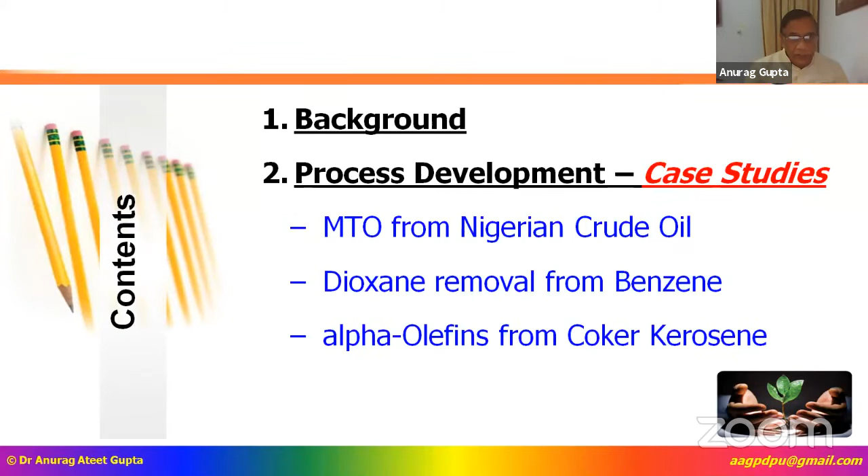So the topic of my presentation is innovation-based case studies on industrial process development. The total presentation is divided into two parts. I'll give a small background, and then I'll discuss with all of you three very important case studies.

Why these case studies, and what for these case studies? They are basically based on innovation, and these case studies created IPR, that is patents, and they are related to oil refineries. So in the background, I'll be discussing very briefly about innovation, creativity, what exactly is IPR, how this IPR is relevant, and how this is related to the refineries and what are the refineries - and I'll do that in a brief manner.

Now, what exactly is the difference between innovation and invention? The invention basically has two very important key features, that is creation and the first time. So invention can be defined as the creation of a product or introduction of a process for the first time. Then when we talk about innovation, of course there are so many definitions for innovation. The one which I like most is that it is basically the process of translating that invention or idea into a good or service that primarily creates value. So that is the difference between invention and innovation.

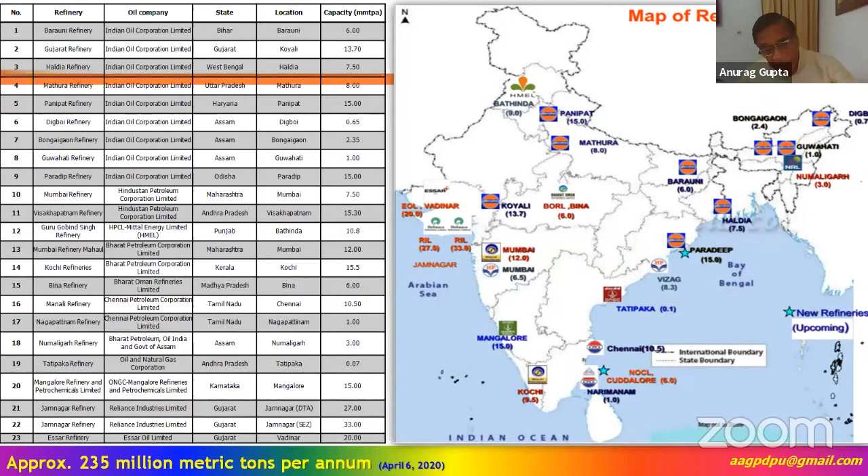In India, we have got 23 public as well as private sector refineries, and they are processing to the tune of about 235 million metric tons of crude per annum. This is as per the data published on 6th of April 2020.

Now, there are basically two types of refineries - I would say broadly two types, otherwise it could be three or four types. One of them is a refinery which is making only fuels, starting from gases, LPG, to gasoline, jet fuel, diesel, kerosene, and fuel oil. This is the simplistic configuration of a fuel-based refinery.

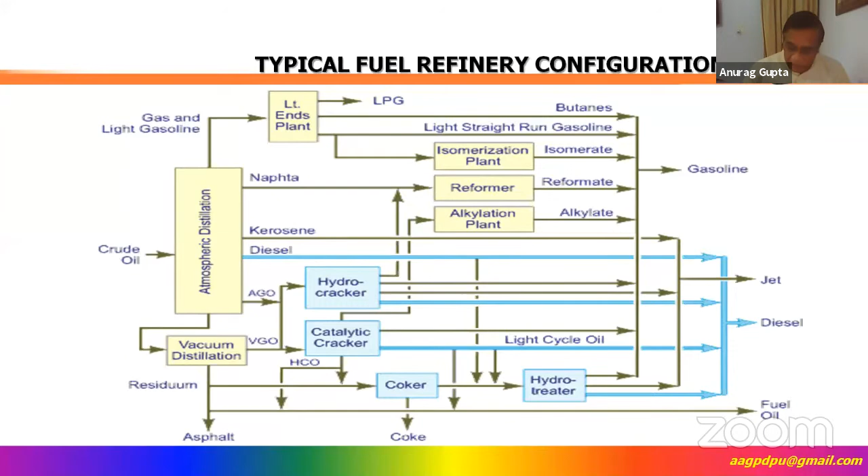There is another type of refinery which basically makes and processes lubricant oils. So you take the residue from the atmospheric distillation bottom and process it using different types of refining processes, and you end up with lubricants. These lubricants, along with additives, would produce lube oils, which are being used in so many applications.

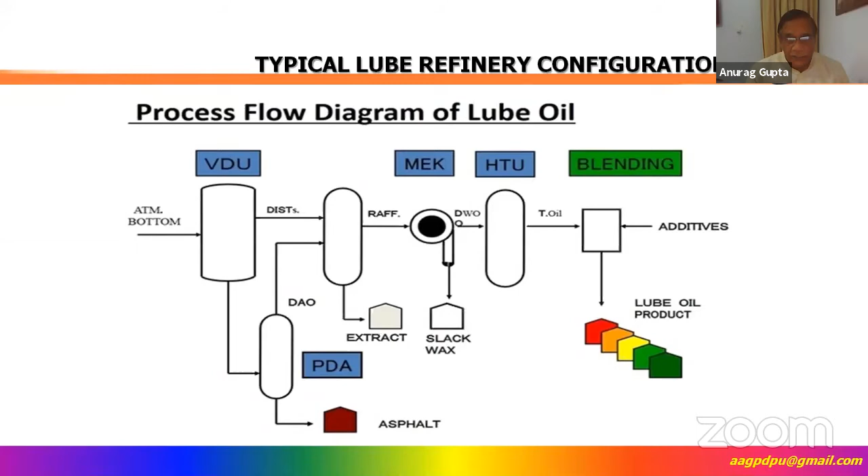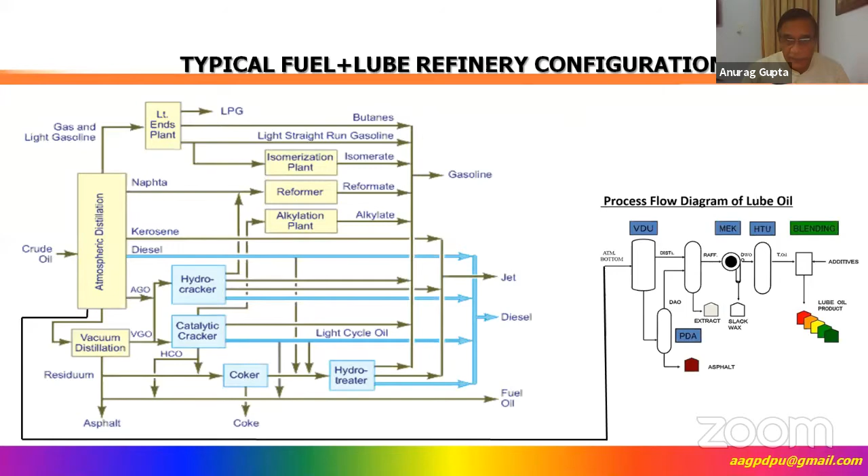But there is another type of refinery, which is a combination of these two - a single refinery making and processing fuels as well as lubricant oil. The classical refinery in our country is Chennai Petroleum Corporation Limited, CPCL. It's the only refinery in our country which is making both fuels as well as lubricants.

There are other types of refineries also which are integrated with petrochemicals. Of course, it has got no direct relevance with this particular presentation, so I am not going to discuss about those types of refineries.

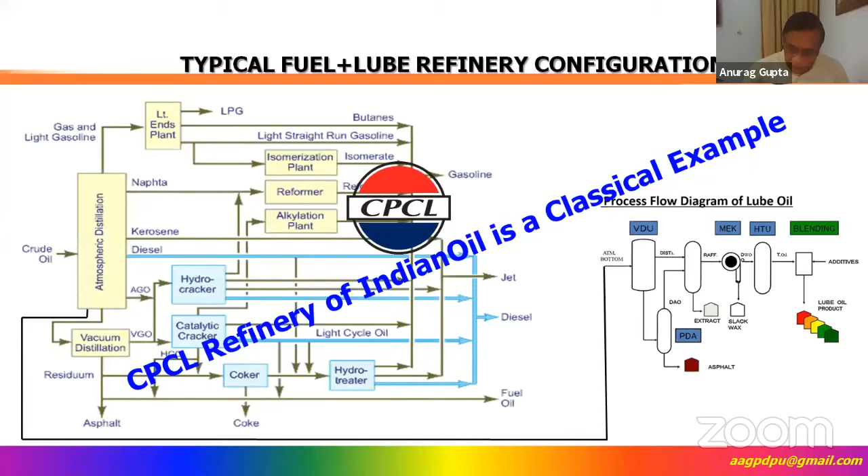Now, up till now, I have discussed with you three aspects: innovation, invention, IPR, and what exactly is the refinery. These particular three case studies are basically related to all these three aspects which I have just discussed with all of you.

In all three case studies, the strategy my team adopted was basically providing simple solutions to complex problems. But a simple solution is the toughest challenge. Simple solution doesn't mean you just go and do it and everything falls in order. All three case studies I've taken are basically about providing simple solutions to very complex problems.

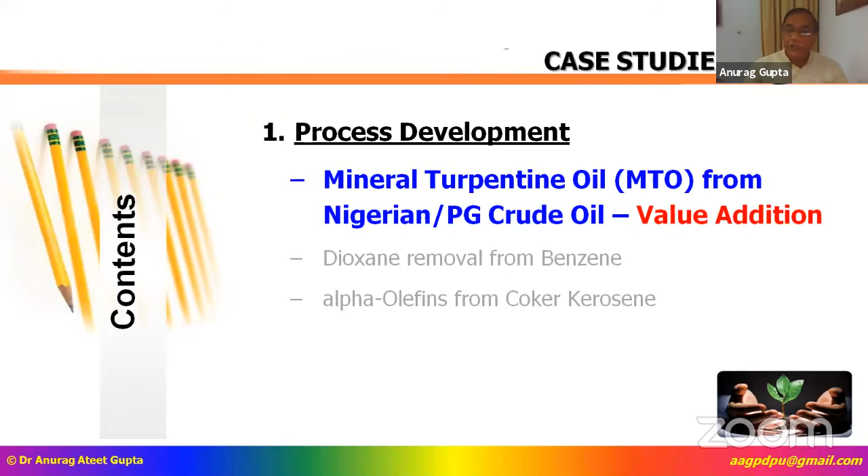So I'll start with the first case study. This is basically for producing mineral turpentine oil from Nigerian and Persian Gulf crude oil, which is value addition to the refineries. This is a very complex refinery process, but I'm not going to discuss the details because it's very complex.

Most important thing is that along with fuels and lubricants, refineries are also making solvents. And this MTO, or mineral turpentine oil, is one of the very important solvents being used industrially in so many applications.

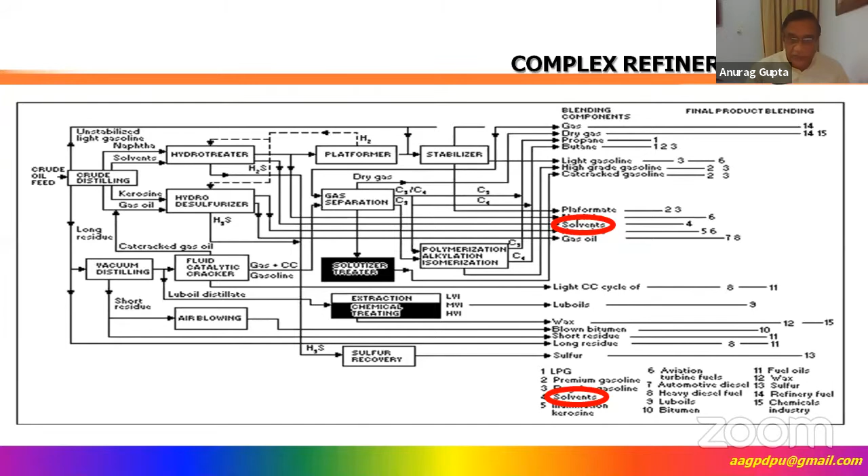Indian Oil, for example, is a bulk producer of mineral turpentine oil. This MTO has a narrow boiling range of 145 to 205 degrees centigrade, and most importantly it should be colorless - the Saybolt color rating should be better than +20. MTO is manufactured by some Indian oil refineries meeting the Bureau of Indian Standards specification, IS 1745 1978.

Now, the most important thing for making MTO is that high sulfur and nitrogen containing crude oils are not suitable for its production. But high nitrogen and sulfur crudes are the cheaper crudes. So if you look at the Indian scenario, all our refineries are basically tuned to take worst quality crude to produce best quality fuel - meaning we process and procure very high sulfur and nitrogen containing crude oils because they're cheaper. Since we import more than 85% of our crude oil, this becomes very important for the economics.

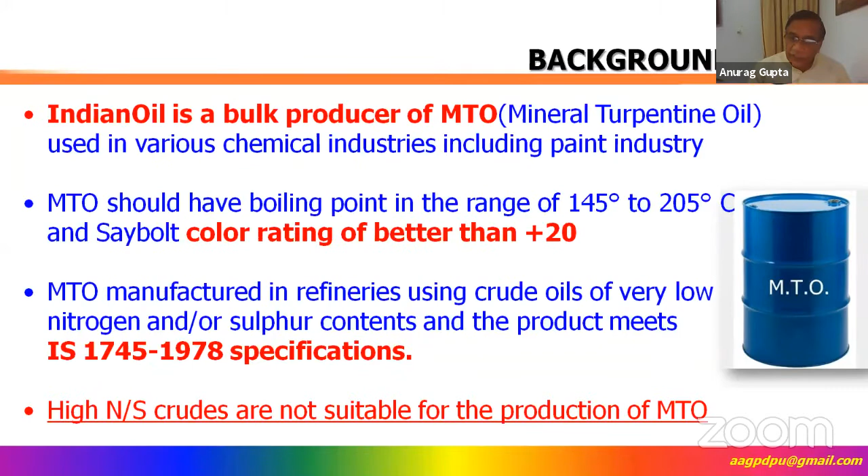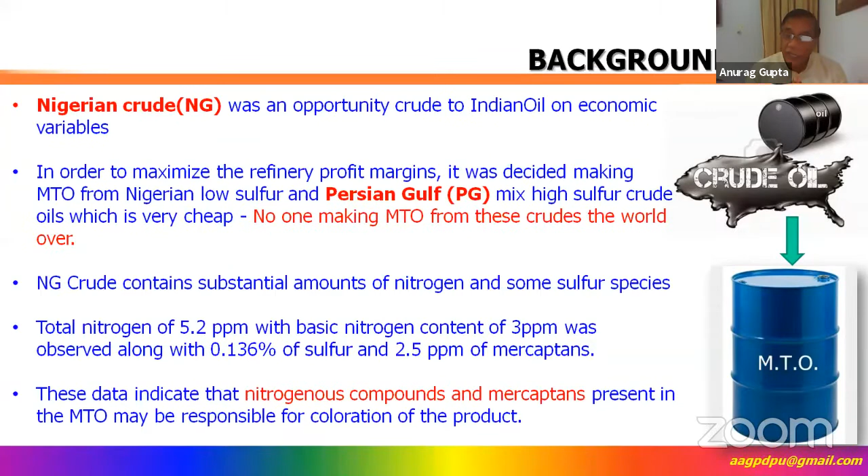So Nigerian crude and Persian Gulf crude oil contain huge amounts of sulfur and nitrogen. These types of crude oils are not suitable for making MTO, which should be water white and free from sulfur and nitrogen species.

There is a big challenge because one of Indian Oil's biggest refineries, Panipat refinery, processes Nigerian and Persian Gulf crude. They also wanted to make mineral turpentine oil because in the northern part of the country, the requirement of MTO is enormous. So they posed this challenge to Indian Oil R&D Center to devise a process by which high sulfur and nitrogen containing crude oils can be used for making mineral turpentine oil.

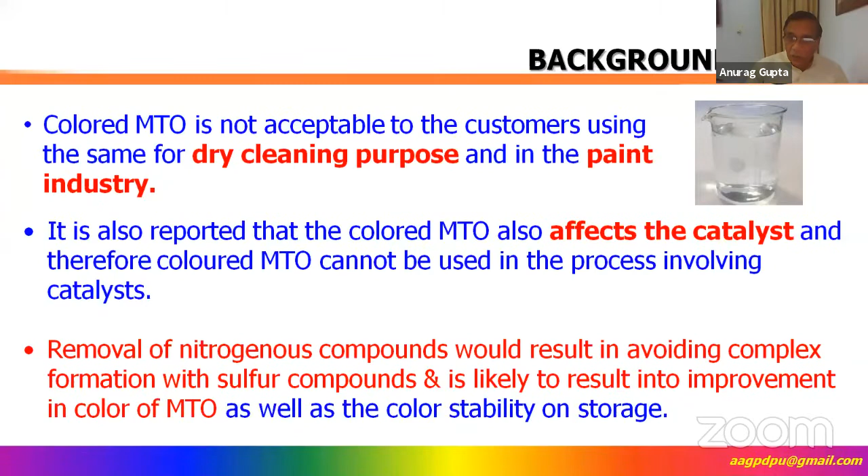Why is color very important? Because MTO is often used for dry cleaning purposes, so if you have color it will basically make your clothes colored. It's also used in the paint industry and as a solvent in different processes. If you have high amounts of nitrogen and sulfur, it affects the catalyst. So removal of nitrogenous compounds and sulfur becomes very important to make a good quality mineral turpentine oil.

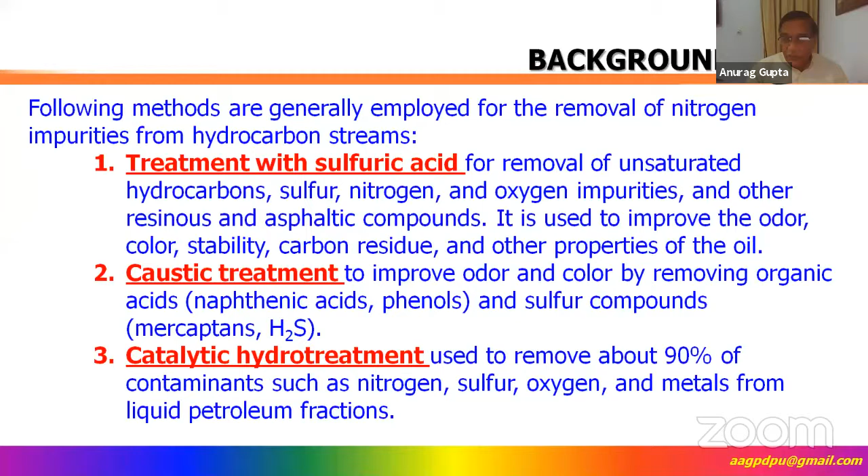What are the processes for making these types of MTO? Treatment with sulfuric acid, treatment with caustic soda, and catalytic hydrotreatment. But there are issues - refineries process everything in million metric tons, not kilograms or tons. So handling voluminous amounts of corrosive mineral acids and alkali at the refinery is not advisable. Also, with catalytic hydrotreatment, hydrogen being very costly makes the process uneconomical, and the cost of MTO would go very high and not be affordable for customers.

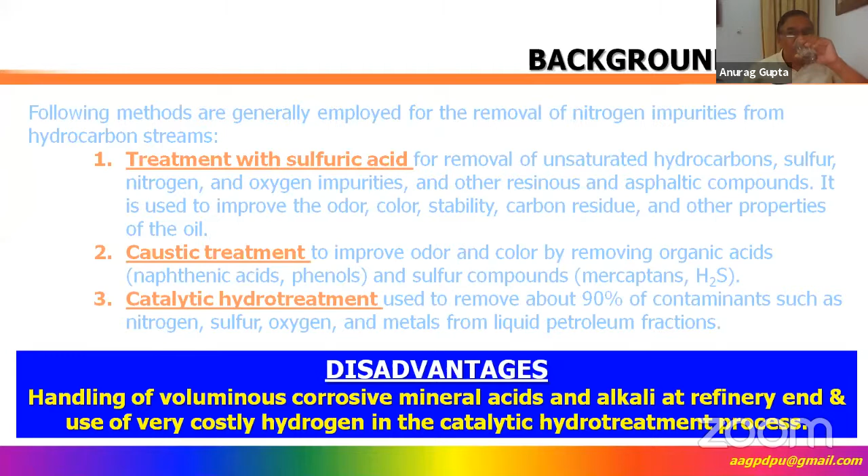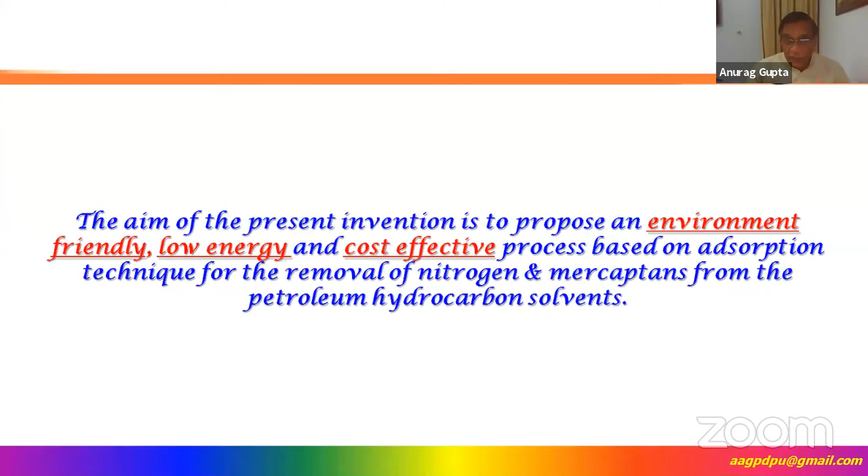So the aim for the present invention is to propose an environment-friendly process avoiding acid and alkali, a very low energy process - because increasing the energy of the process raises the cost - and of course a cost-effective process, preferably based on adsorption technique, because that can be put up at the refinery at very low cost and with low processing time. So this was the aim for this case study.

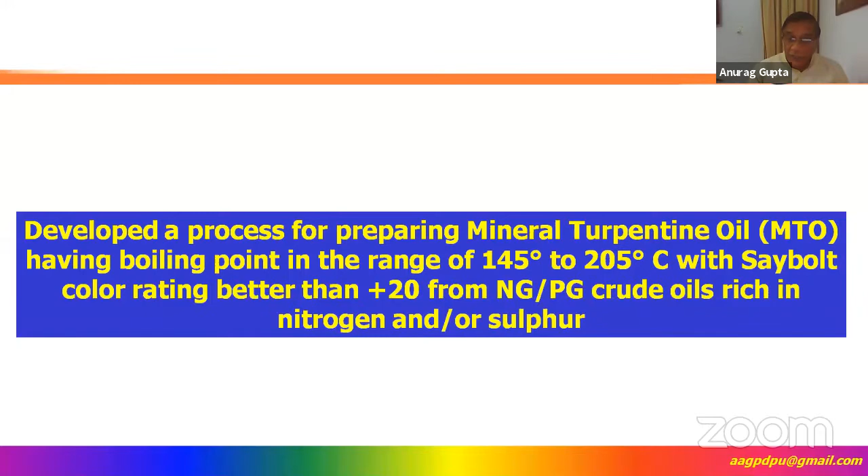So at Indian Oil R&D Center, we developed a process for making MTO having a boiling point in the range of 145 to 205 degrees centigrade from the worst type of crude oil - Nigerian crude oil and Persian Gulf crude, which were rich in nitrogen and sulfur, as I discussed just now.

Now look at the regular process at the refinery. There is a distillation section wherein crude oil comes and it is being distilled into different fractions. A particular fraction boiling in the range of about 130 to 250 is separated and treated in the Merox process, wherein sulfur is deactivated. And from there, you do a distillation in order to get a product boiling in the range of mineral turpentine oil, that is 145 to 205 degrees centigrade. Up to these three sections, everything is possible and in position in the refineries.

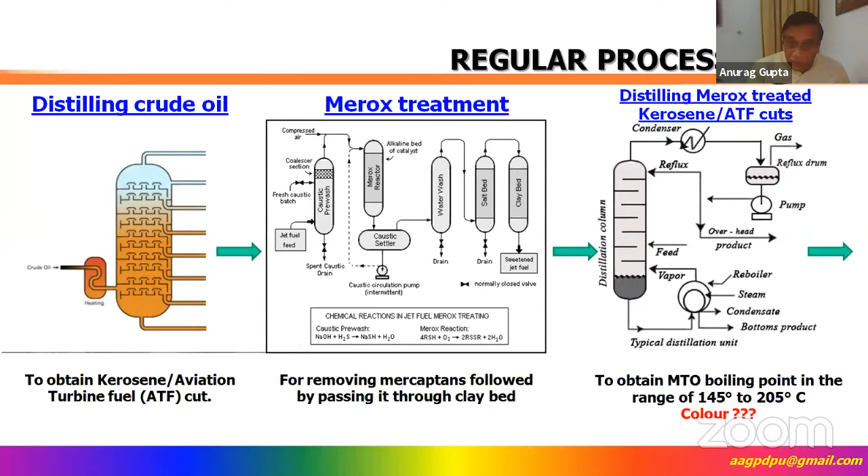But the problem is of color. So what we did was, this is the innovative step. The rundown MTO from the previous section was subjected to liquid phase adsorption using molecular sieves, modified clays, and mixture thereof. And the most important thing was the temperatures were ambient, so we can save on energy, and the pressures were also ambient, so you need not have higher pressure applied onto the process.

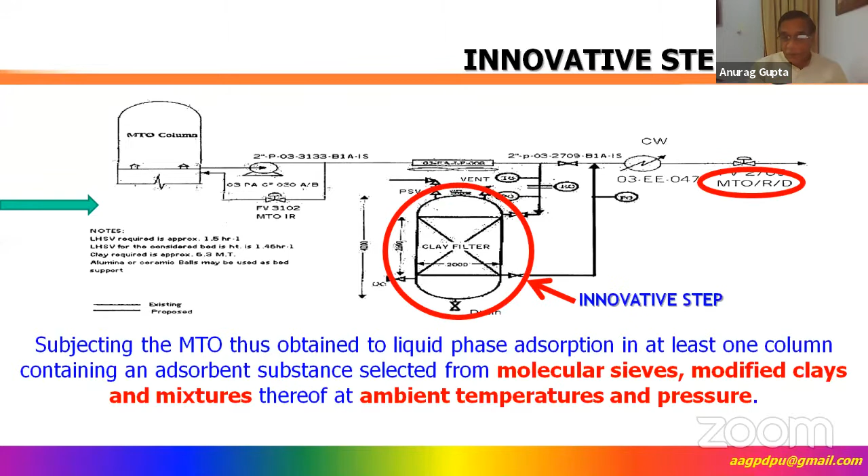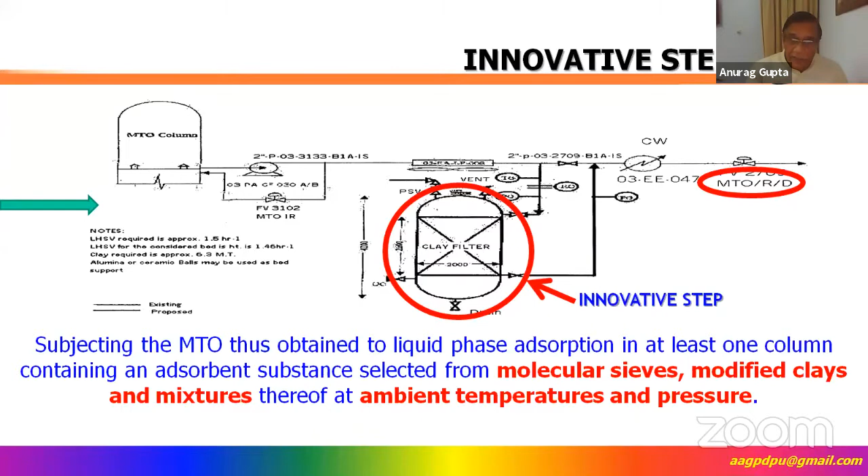So what we did, it's a very simple sort of thing. We put up a column, which we call a clay filter, filled either with molecular sieves, modified clay, or mixture thereof. And we get MTO, which meets the requirement of Bureau of Indian Standard specification in the same boiling range, and water white. So look at this particular thing, a very, very simple solution to a very complex problem. Because none of the refineries in any part of the world is making MTO from crude like Persian Gulf or Nigerian crude. So this is a very simple solution to a complex problem.

So what we did was we used molecular sieves of different types. We used a modified clay known as Filtrol 24, very readily available in the refineries, basically for production of aviation turbine fuel. So nothing we imported, nothing we bought from outside, everything was available, even the column was available in the refinery. So the total cost of this particular project was to the tune of only 5 lakhs, which is nothing.

Another important thing was that these clays and molecular sieves, which are used for making this water white MTO, can be regenerated also. It can be regenerated by passing a high nitrogen stream at a temperature of about 200 to 300 degrees centigrade to regenerate that particular clay or molecular sieve, so that you can keep recycling the same molecular sieves and clay in the process for at least 200 to 300 runs at a time.

So this process was upscaled at the Panipat refinery, and commercial production started from 2001 onwards. A very, very interesting story, which I'll discuss with you at the end of this presentation. We filed Indian and US patents, and you'll be surprised to know that we got this particular patent within 2 years. That US patent, we got it within 2 years. So this is one case study.

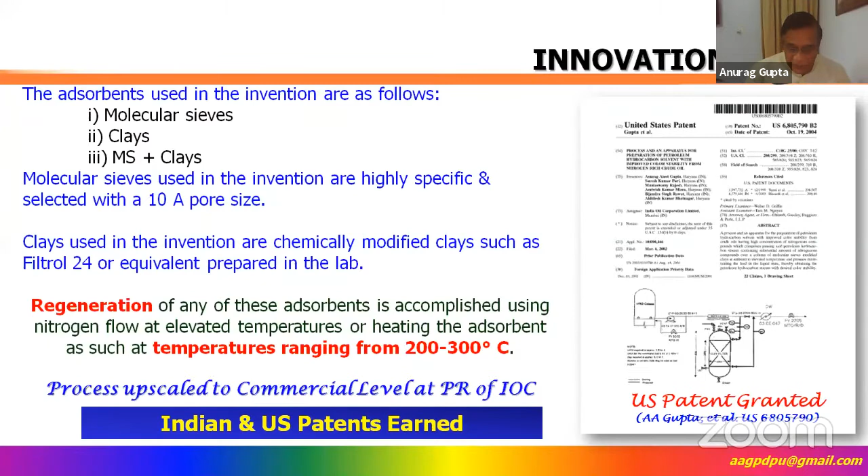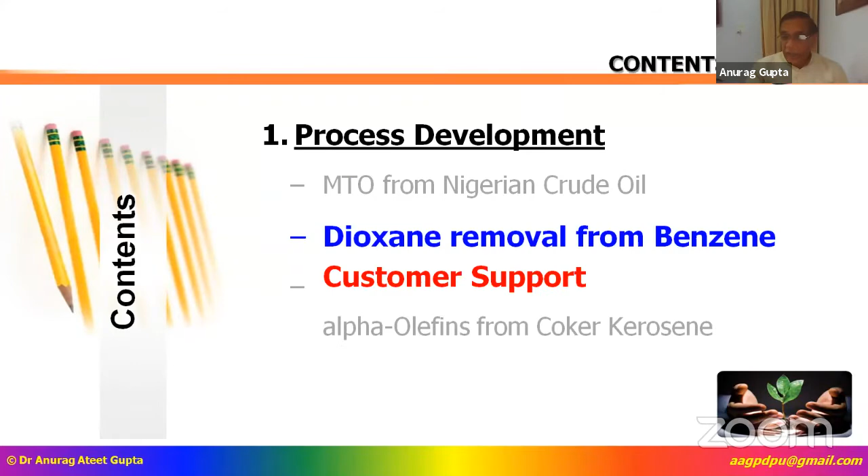Second case study, which I want to discuss, is another very important aspect: dioxane removal from benzene, basically for customer support. You must all be knowing Nirma. In mid 90s, around 1998-99, they set up a linear alkyl benzene manufacturing plant based on solid catalyst. That was the first such plant in our country, also known as the Detal process, from a process licensor called UOP, that is Universal Oil Products. So it's based on the UOP technology. And they positioned this particular plant very close to the Indian Oil Refinery of Baroda.

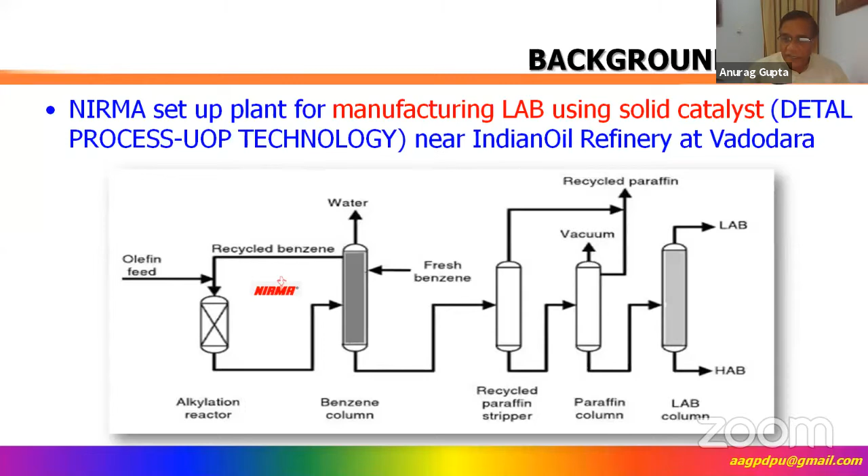So this is basically the schematics, I'm not going to discuss. It basically takes olefinic feed and produces linear alkyl benzene and heavy alkyl benzene. So they require a very specific type of benzene. It should not have dioxane content more than 1 ppm. Dioxane is a chemical I'll discuss with you a little later. The concentration of dioxane, because dioxane is the poison of the particular process, should not be more than 1 part per million.

And at the Gujarat refinery, the same UOP has provided a technology known as UDEX that was operational, wherein the refinery was using a chemical called TTEG.

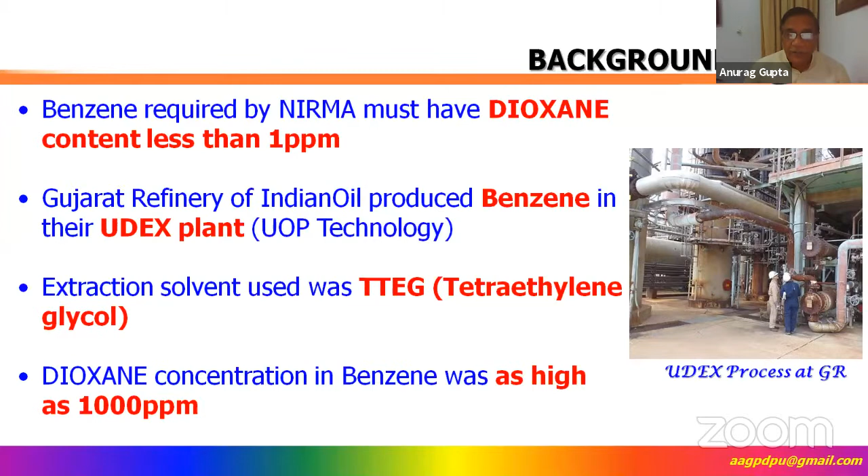So the UDEX plant is basically using TTEG, that is tetraethylene glycol, for extracting and making benzene. But when we tested this particular sample of ours at the Gujarat refinery, we found that the dioxane concentration was to the tune of about 1000 parts per million. So there was a big challenge to cut down 1000 parts per million to just 1 part per million. This is basically the schematic of the UDEX process. It takes naphtha, going through various processes, including the extraction.

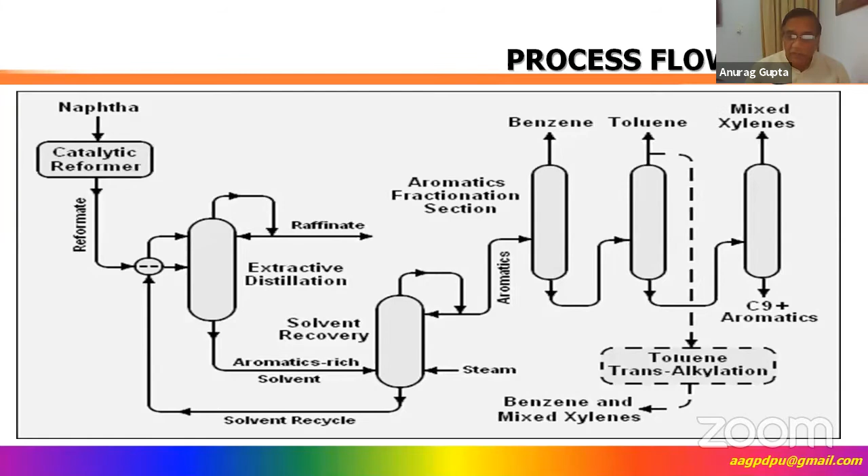It basically gives benzene, but of course, having a large amount of dioxane content. So Indian Oil then approached UOP, because the process license with Nirma was also from UOP, and our process was also based on UOP technology.

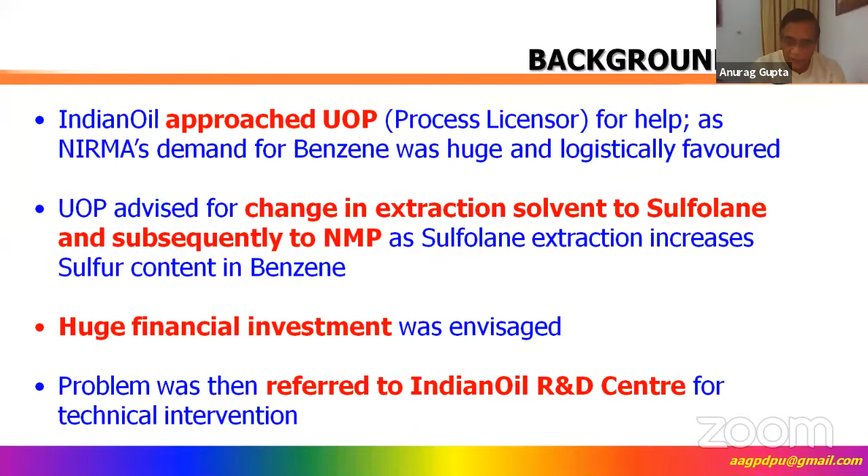UOP in turn advised that with this particular TTEG, it is next to impossible, it cannot be done. So therefore, you'll have to convert the entire process either to sulfolane extraction or to NMP extraction, which was costed at that point in time at about 600 crores of Indian rupees. So of course, it was a big amount of money. Therefore, this particular problem was referred to Indian Oil R&D Center for technical intervention.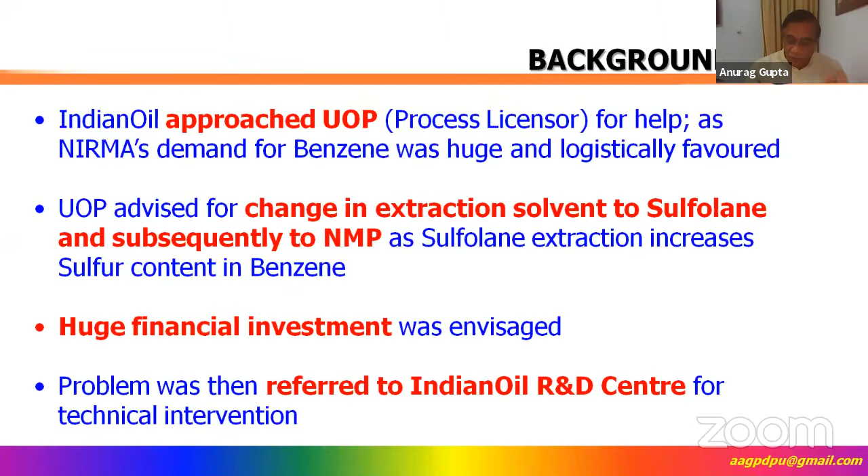So how did we approach this, and what innovation did we do?

First and foremost, my team basically tried to understand how this dioxane is being formed in the benzene. Since TTEG is being used, ethylene glycol and diethylene glycol are basically the impurities. So 2 moles of ethylene glycol, in presence of sulfuric acid, forms dioxane, and this is basically the mechanism for that. And if you have diethylene glycol at elevated temperature in presence of acid, it also forms dioxane.

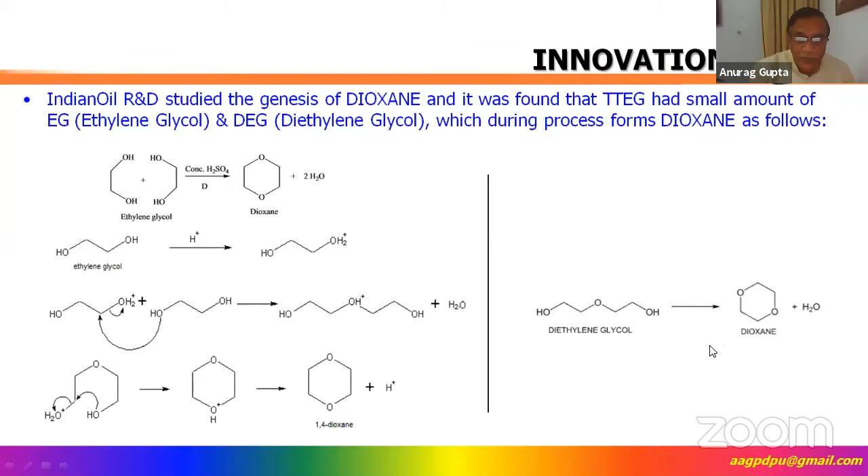So we came to know why dioxane is present in excess quantity in the TTEG. Our first strategy was, if you want to cut down the dioxane from the TTEG, the concentration of ethylene glycol and diethylene glycol should be substantially removed from the extractant tetraethylene glycol. So this is one strategy we adopted.

The second thing we found out was that dioxane forms an azeotrope with toluene, because toluene is one of the impurities or components of benzene, and a certain amount of toluene is allowed in the specification itself. So we found that if you cut down toluene concentration, eventually the dioxane would also come down in the downstream of benzene. This is the second innovation and strategy we adopted.

And then we finished the rundown benzene with liquid phase adsorption using molecular sieve and modified clay, which we had used earlier for the MTO process, so we had that sort of experience with us. Adopting these three strategies, we did trials in the laboratory, and we found that yes, we can achieve a benzene having less than 1 part per million of dioxane.

So we did plant trials at the then IPCL at Baroda. What we did was, we approached the TTEG supplier and said we want TTEG having less than 0.5% of ethylene glycol and diethylene glycol, which he gladly supplied to us. And at the pilot plant trial, we could generate benzene with less than 1 part per million of dioxane.

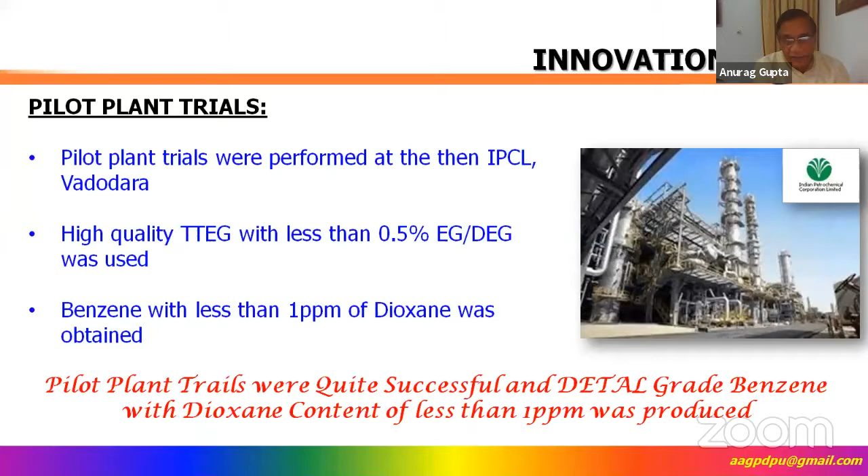So the pilot plant trials were really successful. We presented this to our management, and management in turn took it up with NIRMA, and we sent samples to NIRMA, and NIRMA approved those samples.

So look at this, this is a very simple solution to a very complex problem. The complex problem was that, as per UOP, we were supposed to revamp the entire process to produce benzene having less than 1 part per million of dioxane. But what we did was provide a very simple solution so as to make dioxane-free benzene in the existing system.

So we did a successful commercial trial in our Gujarat refinery. We produced a large amount of benzene. We had given samples to NIRMA, NIRMA approved those samples, and since then we started supplying detal grade benzene to NIRMA on a sustainable basis.

So in the process, we filed both Indian as well as US patents, and here also we got this particular patent in about 2 years' time. So this is another success story or a case study which I wanted to discuss with all of you.

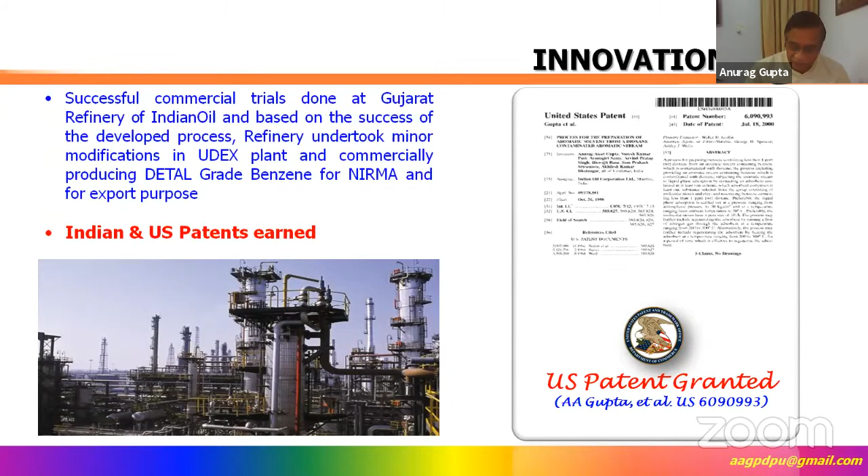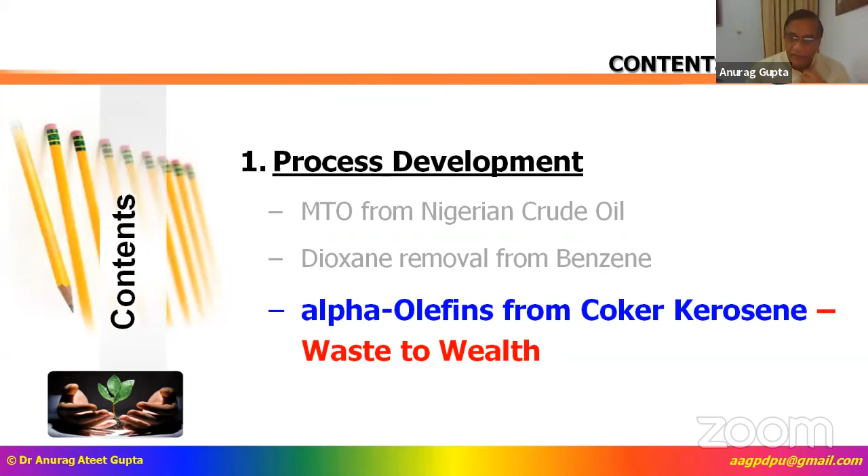Now, the third case study is also very important and very interesting, and that is making alpha olefins from coker kerosene. This is basically converting waste to wealth. How waste to wealth? That I'll be discussing in the ensuing slides.

See, this is a typical coker-based refinery. In Indian Oil, the Barauni refinery, which is in the northeastern part of our country, has got a big coker unit which basically produces, along with different types of products, industrial fuels.

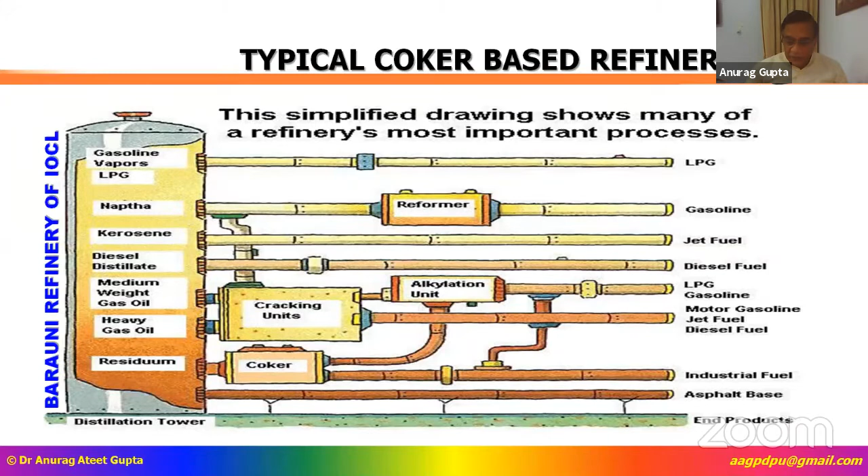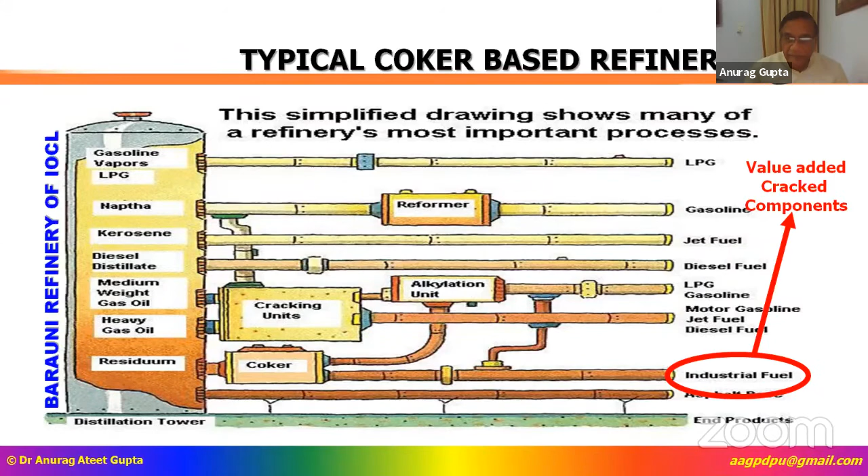Now these industrial fuels contain very valuable crack products. Crack product means olefinic products. They contain a lot of alpha olefins and normal paraffins, which are very valuable raw materials for making different types of value-added chemicals.

For example, you can do isomerization with the alpha olefins to get streams which can be used for high octane gasoline. You can do metathesis to get different types of linear internal olefins. You can do oligomerization to have medium molecular weight products. You can do dimerization, you can do isomerization - I mean, you name a chemical reaction, you can do it.

This particular stream from the coker-based refinery was basically a waste stream, but it contains a very valuable component, that is alpha olefins and normal paraffins. Now there is a small story behind why we have taken up this particular project.

Around the 90s, this particular refinery, Barauni refinery, was not getting substantial amounts of crude oil for processing. So the refinery was looking for some avenues, some projects, which could add value to make the refinery profitable. So when we presented this project to them, that there is a possibility of making alpha olefins and normal paraffins, which are used for making linear alkyl benzene, which can be sulfonated to make detergents and dispersants, immediately they said yes, fine, we'll give you this particular stream.

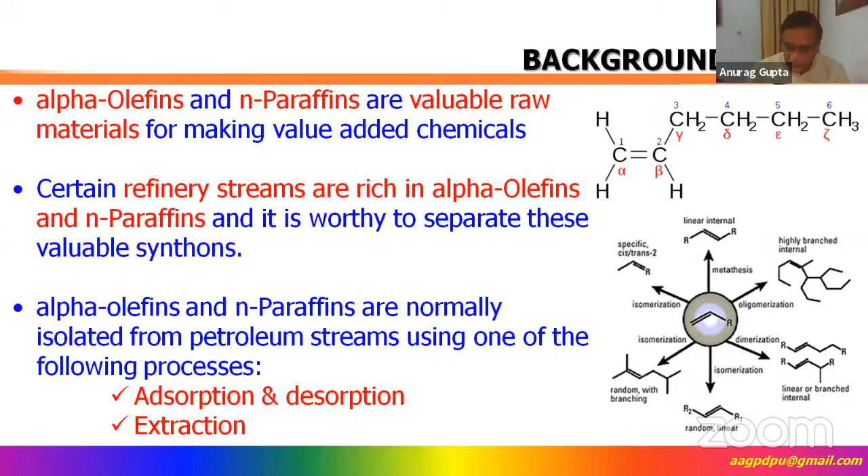What we did was a different type of approach. We performed a different type of operation, known as urea adduction. It's not a new process, it's a very well-established process. It has been used in Japan for a very long time, basically for separation of linear products, not exactly alpha olefins and paraffins, but other types of products, and they've got a running refinery there. So urea adduction is a separation technique based on size exclusion.

Now, a very important thing is, I'll show with the help of certain schematics and slides what exactly is the meaning of size exclusion, and how the separation happens.

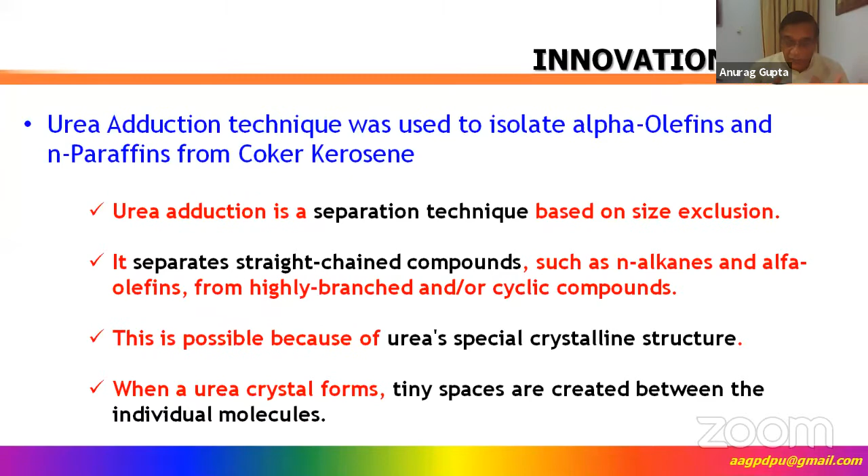Another very important aspect is that the conventional urea adduction process basically generates a urea solution. And if you want to regenerate urea from that solution, you require tremendous amounts of heat to distill off and evaporate the water to get solid urea. So there were two challenges: one is to separate linear alpha olefins and paraffins, and at the same time avoid this step of having aqueous urea, because then the economics become really unviable.

So I'll show you something important here. This I was discussing, that conventionally the crystals are dissolved in water. This is the conventional method. Once you dissolve it, it goes into the water, and if you want to regenerate urea, you'll have to remove the water, which is a very cost-intensive process.

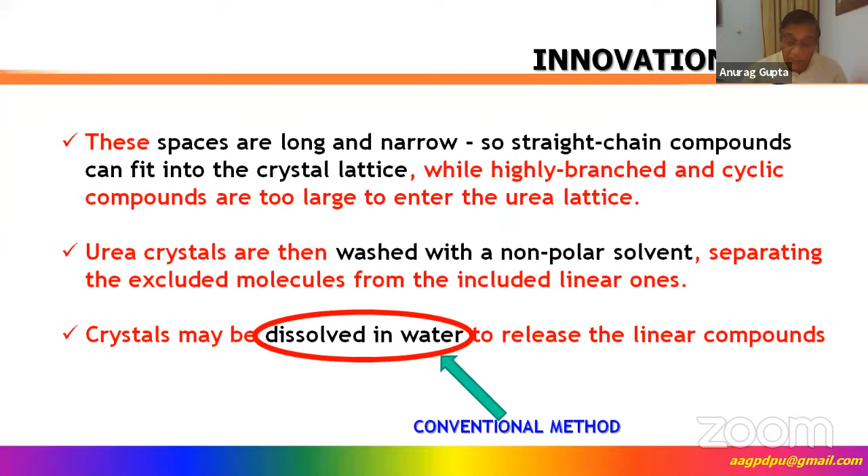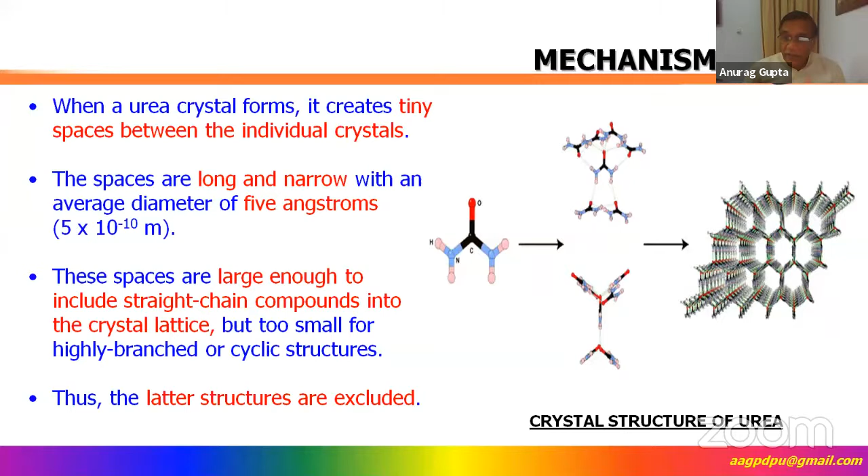Now, urea is a very peculiar chemical. It has spaces in between which are long and narrow. The average diameter is about 5 angstroms, and these spaces are large enough to include linear chain products, excluding branched chain and bigger products. This is basically the crystal structure of urea.

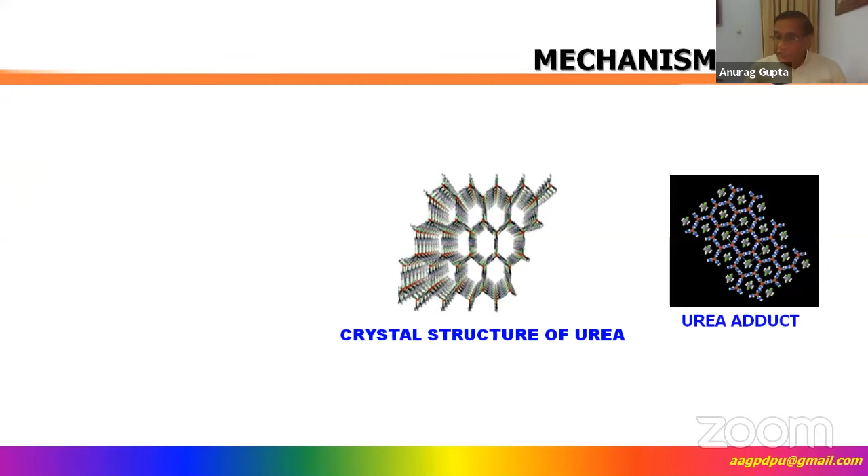This is the urea adduct, in which the paraffin and alpha olefin, which are linear in nature, are entrapped. So you take a linear product, say for example decane or decene. Decene is an olefin, decane is an alkane, so these are linear products. They go and sit into the lattice of urea because of their size—their cross-sectional size is never beyond 5 angstroms. So they can very suitably go and sit into the matrix of urea.

But if you take a branched alkane, it will not go in because the size is too big. Likewise, if you take cyclohexane, it will also not go because of the size of the molecule. Or if you take a steroidal molecule, it will also not go inside. So based on size exclusion, only linear paraffins and olefins can go inside the matrix of the urea crystal and form a urea adduct.

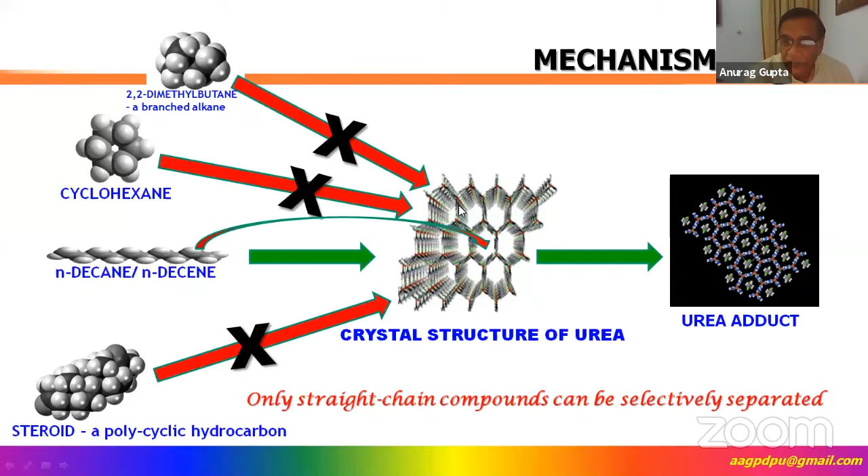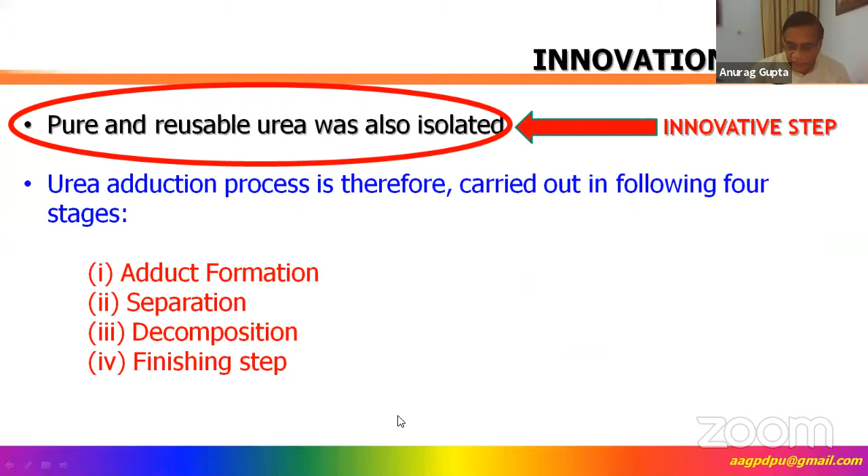So therefore, a second important aspect was that through this process we got pure and reusable urea instead of urea solution, so a huge amount of energy was avoided. The total process was divided into 4 steps: formation of the adduct, separation, decomposition, and the finishing step, basically to get the linear products out of it. So we developed a novel process by which we isolated alpha olefins and normal paraffins from a base product, that is coker kerosene from the Barauni refinery, and also recovered solid and reusable urea.

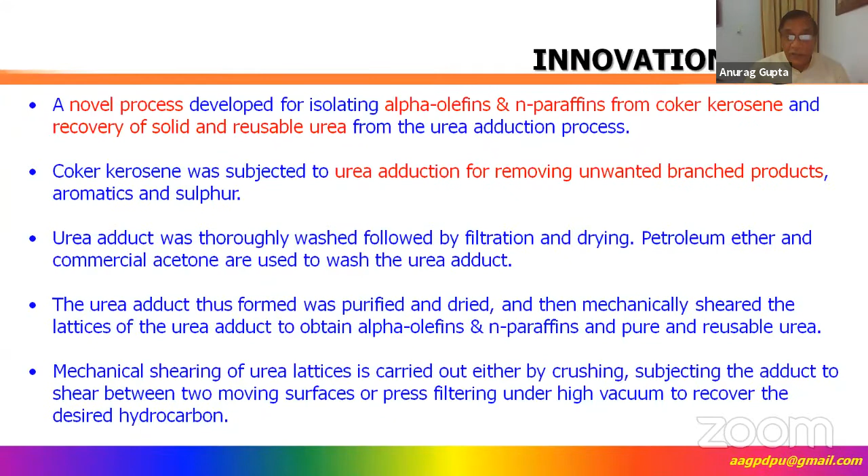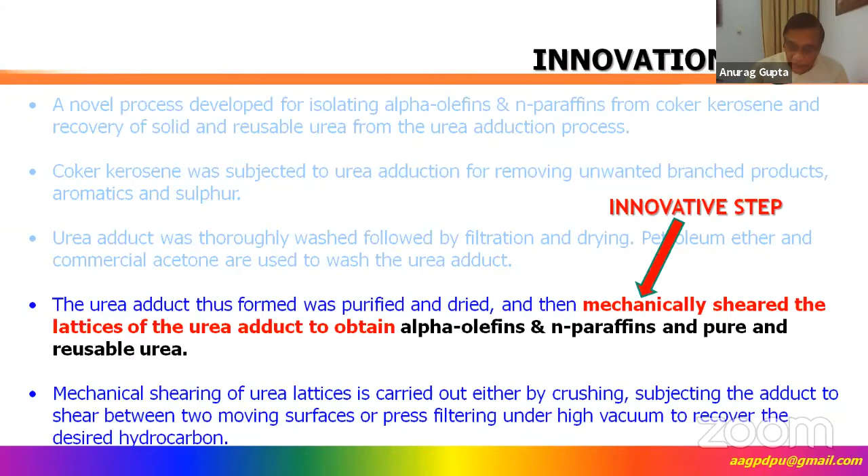How did we do it? Instead of putting the stuff into water to dissolve the urea in order to separate the alkane, we sheared it mechanically. You have seen how juice is made—it's basically taking out juice from the matrix of a fruit. So we took that concept, and we did mechanical shearing of the urea adduct, basically to separate the hydrocarbon product and the pure urea. That's the innovative step which we used in this process.

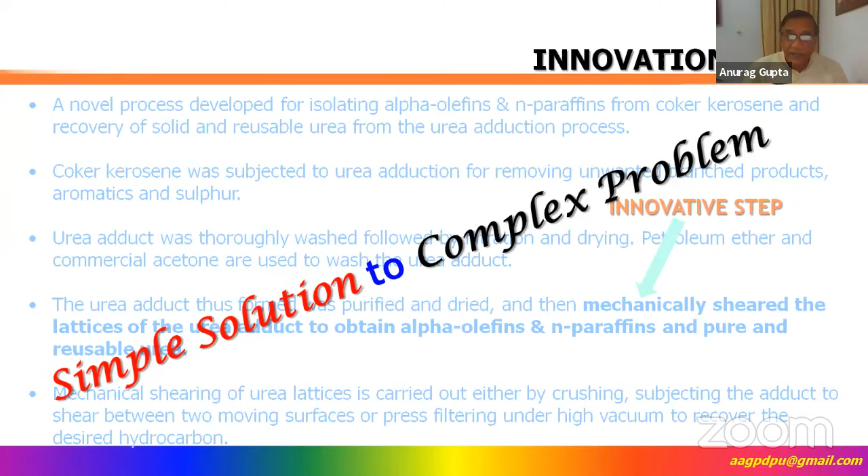So look, it's a very simple solution to a very complex problem. It added to the economics of the refinery at that point in time. We did a pilot testing at the Hindustan Insecticide Limited, situated in Gurugram, and then we scaled up this process along with the Barauni refinery and the process team of Indian Oil. Then we put up a 1 metric ton pilot plant at the Barauni refinery with the help of an agency called Blue Star.

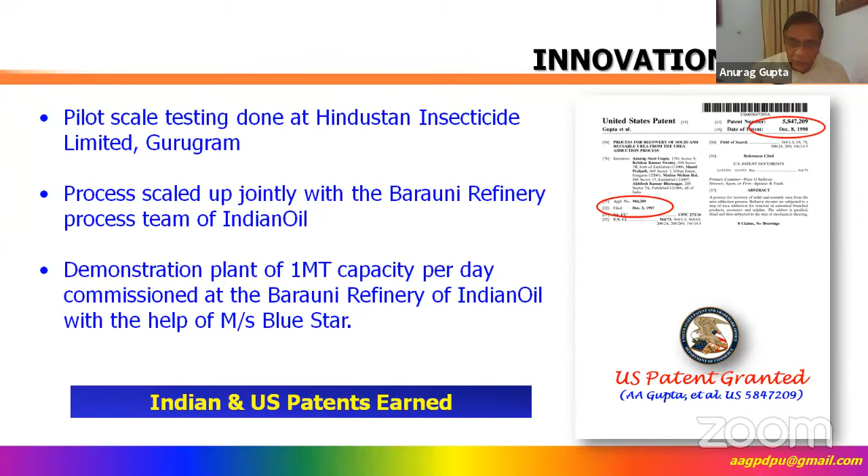So here also we filed Indian and US patent. The beauty and novelty of this particular process is that we got this patent. We filed it on December 3, 1997, and got the US patent on December 8, 1998 - within just one year, the process was so unique. That's another success story of this particular process I wanted to discuss with you.

Now, I have already discussed 3 case studies, and since I've talked about the importance of patents, innovation, and simple solutions for complex problems, I must share with you a very interesting fact sheet.

Going back to the mineral turpentine technology, that is MTO technology, which we developed in 2001, we set up this process in one of our refineries, the Panipat refinery, with an investment of just around 5 lakhs. We filed the patent in 2001, and commercial production started that same year at the Panipat refinery.

I superannuated from Indian Oil in December 2014, so the process, during my tenure, ran for about 13 years at the refinery. We have calculated the profit accrued by the organization till 2014. In this process, we had a team of 5 members.